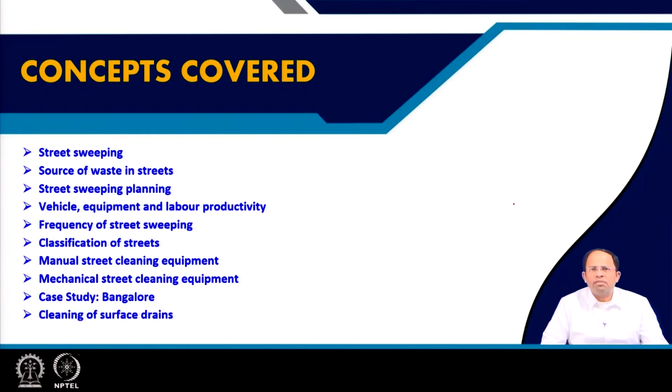Street sweeping is essential for all urban areas, particularly in the Indian context, because in many places in India we don't have a very efficient waste management or collection system, and a lot of people throw garbage on the streets, which requires cleaning. Cleaning of streets ensures a clean and hygienic urban environment, and it's a very basic service provided in most ULBs.

We can go for both manual and mechanical sweeping, but in most parts of India we have very narrow and congested roads, so the only option is manual sweeping. Because of this, the entire planning has to be done so that a group of individuals, whether informal waste workers, workers under a contractor, or workers who have formed a self-help group, come together to provide this kind of service.

Sometimes this staff also belongs to the municipality, since municipalities have a lot of cleaning staff, and many of them have shown interest that they don't want to clean or collect garbage from houses or residences; instead they prefer the street cleaning part. So street cleaning is provided by both municipalities or ULBs using their own staff and contract employees, as well as via self-help groups using informal workers.

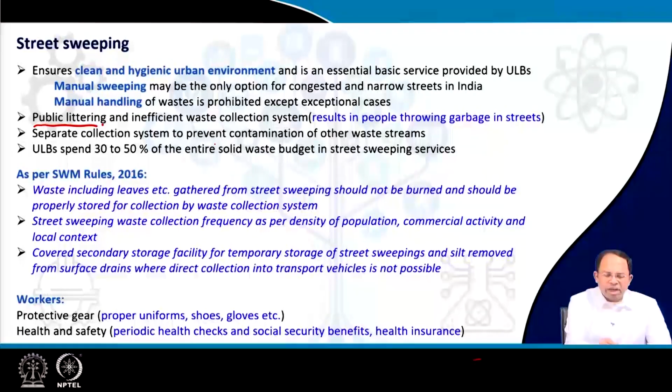Now, this waste stream must not mix with other waste streams, because street sweeping waste usually contains a lot of contaminants, including heavy metals, and if it gets mixed with other waste, it will contaminate those as well.

Sometimes street sweeping is not done alone. Surface drains are also cleaned along with street sweeping, so the silt, sewage, or sludge from the drains may get mixed with the waste, which may contain pathogens. So it's better to keep this waste stream totally separate from other municipal waste streams.

Now, coming to the cost of this kind of service: it's an essential service and has to be provided, otherwise our streets will be filled with garbage. But at the same time, because it's a manual operation done for every street almost every day, ULBs spend around 30 to 50% of the entire solid waste budget on street sweeping services.

As per Solid Waste Management Rules 2016, waste including leaves gathered from street sweeping should not be burned and should be properly stored for collection by the waste collection system.

The leaves and such waste are gathered in the streets from the surrounding vegetation or trees planted along the streets. These should be collected, and we can actually utilize this kind of waste for composting.

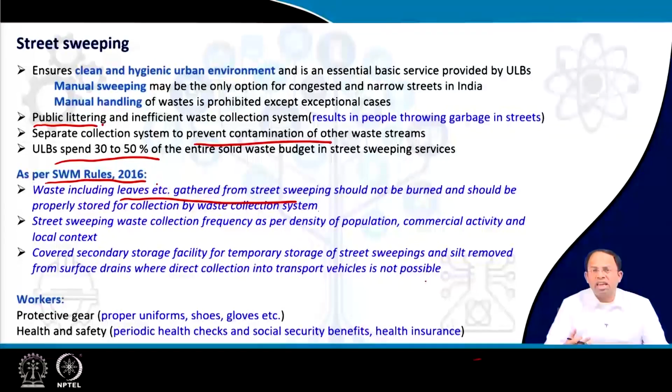A manual waste worker can sweep the streets and store the waste directly into a vehicle, which is then taken for further transport. But if this is inefficient—because after walking maybe 50 meters the vehicle gets filled, requiring a trip to the transfer station and back—that approach may not work well.

Instead, the worker can continue walking and use a storage container along the way—storing waste there as the vehicle fills up, and continuing to store waste in containers. Later, a vehicle comes at a certain time, picks up waste from all these containers, and takes it for disposal or treatment. Both models are fine; depending on the context, the kind of street, and the amount of waste, we must design whichever system works better for that particular area.

All workers should be given protective gear, that means proper uniform, shoes, gloves and all, so that they are protected because they are handling waste. Health and safety is a primary concern.

There has to be periodic checks, and not only physical health but also financial health as well. We have to make sure they are well protected with health insurance and other social security benefits, because there is a chance they are dealing with the waste of society and may fall sick, and society has to take care of them.

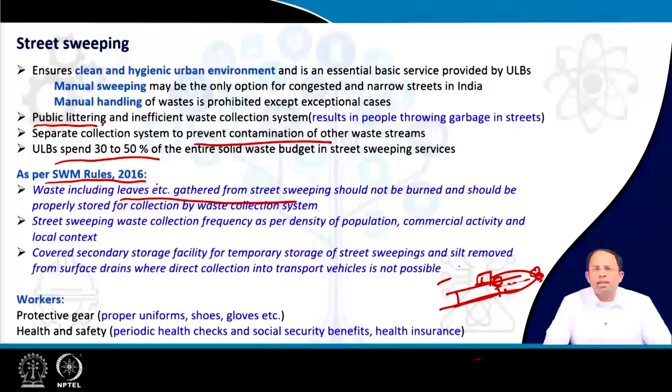Now where does the waste coming into streets come from? One part is natural waste, which is dust from unpaved areas. But even though some Indian cities are very well paved, we still find a lot of dust. The reason is the wind pattern, the surrounding land use, and the nature of soil or how arid it is.

The dust that we find in a particular area is both from local as well as distant origin. That means it may have originated far away, but because of wind it is blown into the city. So that's the first source of natural waste.

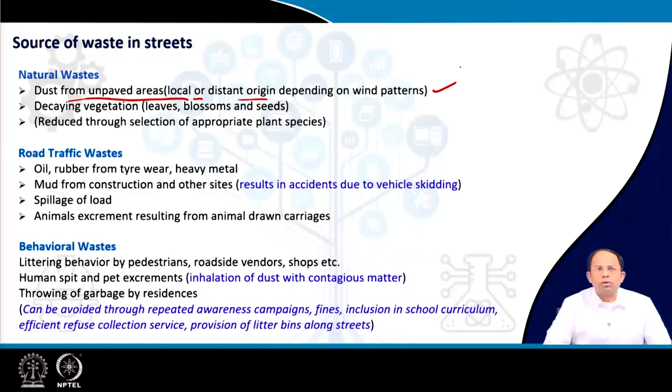Then decaying vegetation - leaves, blossoms and seeds from plants planted along the streets - they fall on the ground, and that is what needs to be collected.

But this part could be reduced because we can select appropriate plant species which don't shed their leaves often - perennial trees instead of deciduous ones which shed their leaves during winter or other seasons. So accordingly, we can choose vegetation which is long lasting and will not shed leaves so much.

The second source of waste is artificial - road traffic waste, oil from cars, rubber from tire wear, heavy metals from fuel, unburned fuel and rubber. All this falls on the street and remains there.

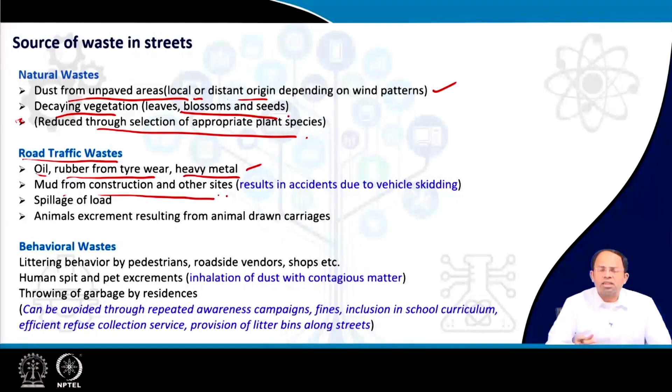Then mud from construction and other sites - a vehicle may move into a construction site and come out with mud, spreading it into the entire street. This results in a lot of skidding for other vehicles, because if there is mud in the street, two-wheelers and others can skid, causing accidents.

Then vehicles can spill their loads. Sometimes vehicles which are not covered properly will spill, including many municipal waste management vehicles - they have a cover, but still from the gaps you will see waste spilling out from those vehicles.

Finally, animal excrement resulting from animal drawn carriages. In some cities we are still using animal drawn carriages, or sometimes animals that are not supposed to roam inside our cities still do, and from their excrement the roads get contaminated. All this garbage originates this way.

The final thing is behavioral waste. This part of the waste we can actually solve through proper awareness campaigns and proper teaching of the people. This is all based on human behavior.

Littering behavior by pedestrians, roadside vendors, and shops. Even though sometimes a garbage bin is provided, roadside vendors and shops will not throw there, but somewhere else. Or people using those roadside vendors will throw somewhere else. Littering behavior of pedestrians also plays a role.

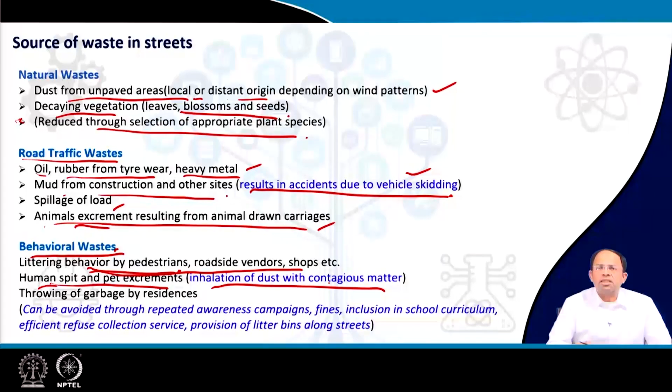And the problem is dust and all - there is a lot of dust in Indian roads. It gets mixed with this contagious matter, then we breathe that, and that leads to other kinds of diseases.

Then there's throwing of garbage by residents. This is more of a reason because other options may not be present or may not be affordable, so people just throw garbage in the street. This kind of behavior can actually be prevented.

This can be avoided using repeated awareness campaigns in a city, fines, and by taking positive measures we can prevent that. We have to incorporate fines, then inclusion in the school curriculum so kids are taught about all this, an efficient refuse collection service, and provision of litter bins along streets.

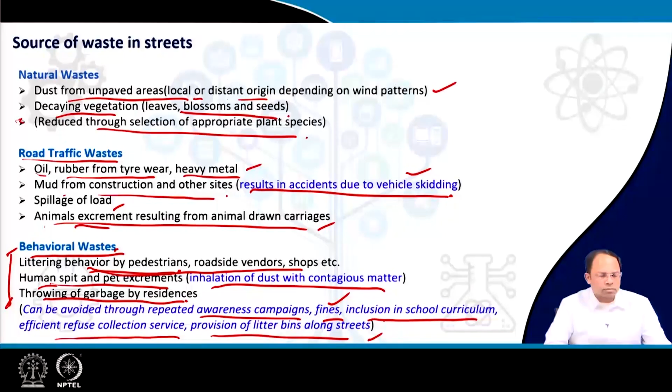So we have discussed this earlier as well. So then, how do I plan for street sweeping?

As we have learnt earlier, the cost of street sweeping and collection is very high, higher than collection from storage containers. That means if a person throws garbage in a storage container, it's easy to collect instead of first cleaning the streets, gathering the garbage and then putting it in the container or directly into the vehicle. So it's always better to put an adequate number of litter bins along the street so people throw their garbage inside those bins, because it will reduce my cleaning time and require fewer people to clean those streets. We can provide both domestic and street litter containers for this purpose.

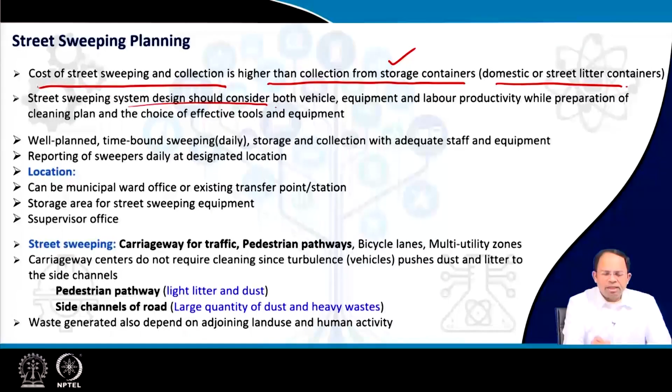Street sweeping system design should consider vehicle, equipment and labor productivity while preparing the cleaning plan and choosing effective tools and equipment. It incorporates human beings, because in most cases we use manual cleaning, but sometimes it may involve larger vehicles or equipment for mechanical cleaning. Lots of tools and equipment are also required to support these activities. But we have to understand which mix of all this, or which models, result in the most efficiency, or rather the most productivity.

Sometimes we find that if an area is very dense, we've discussed labor and vehicle productivity earlier for solid waste collection - the same concept applies here. When we have a road stretch that's very dense, with a lot of waste being generated in the streets, my wheelbarrow will get filled very fast, and whenever it gets filled, I have to take it to the point of disposal.

So an alternate way could be to use a street cleaning vehicle or mechanical vehicle that can cover a larger section of the street at the same time, taking care of the work many workers would otherwise do. Because it has a larger container, it would be efficient to run this operation, both in terms of cost and otherwise. So it depends on which model will work. But maybe in the same city, the road is not designed in a way where a mechanical vehicle could be deployed. All this leads to the selection of an appropriate mechanism - that is what we have to actually find out.

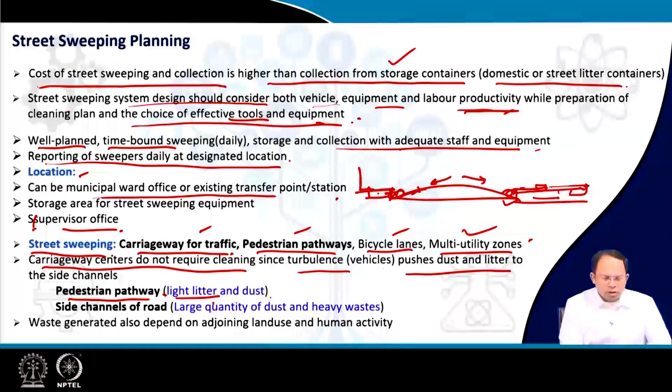People while walking may throw some plastic packet or something, so that is the pedestrian pathway. Whereas at the side channel of roads, at these particular corners, we generate a large quantity of dust and heavy waste. So all this waste comes to the side and gathers at these particular corners.

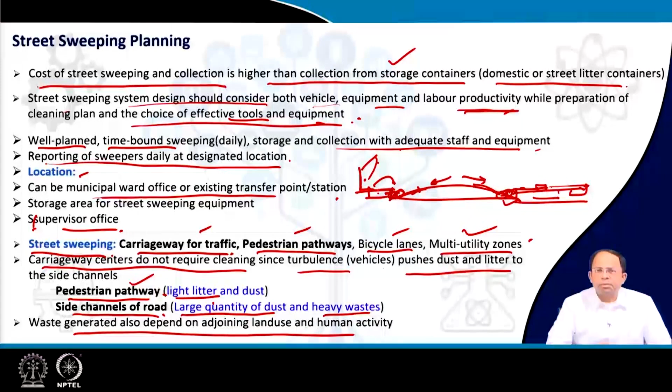So, the waste generated also depends on adjoining land use and human activity. Obviously, if along a particular area you have a continuous stretch of eateries, the waste generated would be as per whatever shops are there along that street.

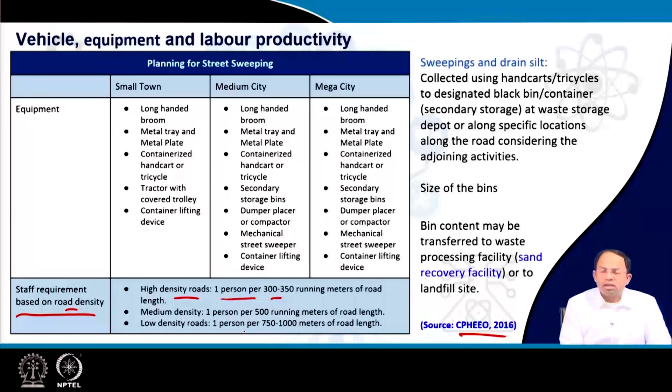Now, these are suggestions for preparation or procurement of equipment, and how many staff you require for different kinds of cities. So you can see over here, staff requirement based on road density. This is given by the CPHEEO manual. It says that for high density roads, we require around 1 person per 300 to 350 running meters of road length. For cleaning around 350 meters of road, you require 1 person per day.

For medium density roads, a person can cover around 500 running meters. And for low density roads, around 1 kilometer of road could be covered by 1 person.

Similarly, what kind of equipment is required depends on which kind of city you are in. Now, the primary difference is the basic cleaning equipment is the same. You require a long-handled broom, or any kind of broom, a metal tray and a metal plate. Why? Because these are used to scoop up the waste which is stuck, like mud and all. You need to press with the metal plate, and once it gets loosened up, you can put it in the tray.

Then there is a need for a containerized handcart or tricycle, as you can see in all the cities, because that is where you put your waste first initially. In some cases, you can have secondary storage bins - since the vehicle gets filled very fast, it's better to keep it stored and keep using the vehicle, otherwise I'd have to take it back to the disposal point each time. So a secondary storage bin is required, placed at certain distances so that I can quickly come back with the vehicle after putting the waste there.

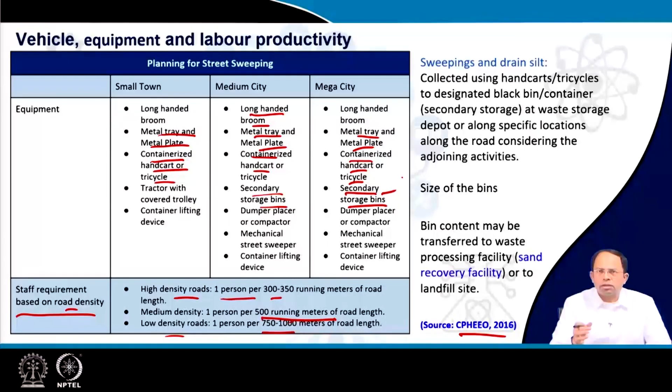Then a tractor with a covered trolley can directly take the contents of the handcart and take it to the landfill site.

It could be a container lifting device as well. Any one kind of vehicle could be there. In case of a medium sized city, we can have similar kinds of vehicles for carrying these larger bins to the final processing site, either the compost plant or the landfill site, or for any other kind of treatment site.

We can also have mechanical street sweepers in both medium or mega cities, and the rest are more or less the same. That means mechanical sweeping is only possible in larger cities where we have wide roads and proper, planned ROWs, whereas in small cities we don't usually have footpaths or properly planned ROWs, and the roads are too thin. So it's better not to go for mechanical sweeping there.

Drain silt, as we said, is also collected along with road sweeping. So we can collect both road sweepings and drain silt using handcarts and tricycles, and they could be taken to designated bins or containers, which are secondary storage at a waste storage depot or other specific locations along the road, considering the adjoining activities.

Maybe it's not possible to have that secondary storage at every 50-meter or every 100-meter stretch of road. So we have to do that amount of movement to a point where we are able to store it, where there is adequate space in the road to set up this kind of secondary storage containers or bins.

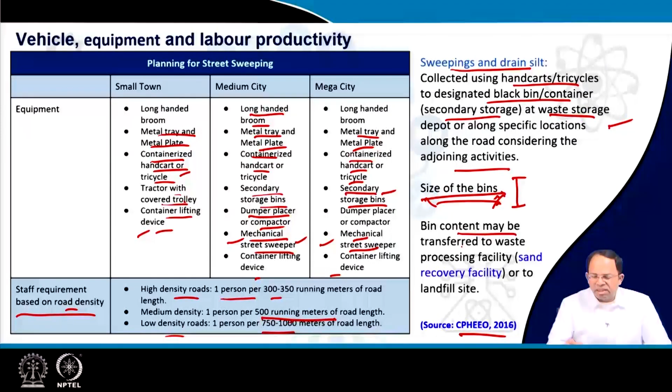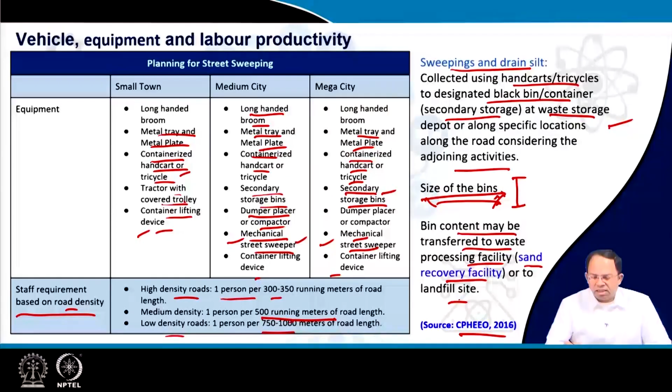Bin content may be transferred to a waste processing facility where we can recover sand, or to a landfill site. In case of organic compostable waste, we can take it to a compost plant, whereas for inert waste or other kinds of road dust, we can take it to a waste processing facility where we can recover sand, and everything else can be taken to the landfill site.

Frequencies of sweeping could be several times a day or even once or twice a week. Now, the time for street cleaning should be such that it doesn't hamper other activities. For example, we can start in the morning, give a break during peak hours, and then in the non-peak hours complete the cleaning process.

Also the shifts require planning, because we cannot make people work more than 8-9 hours, so we have to plan our shifts accordingly. This operation goes on for the entire week, in most cases every day. So the same person cannot keep working 7 days a week continuously, so he has to be given breaks.

That's why the total number of staff required is more than what we would estimate based on the distance versus the number of people required to cover a certain amount of distance per day. We have to keep some more staff in reserve so that people can take holidays on a rotational basis.

The time of street cleaning is again dependent on the city itself, which time it is, whether we are having peak hours, based on what activity is going on along that particular street. All this plays a role. So it is based on considering conflict with traffic during peak hours, parked vehicles, and pedestrians, which helps determine what kind of time would be suitable for street cleaning services.

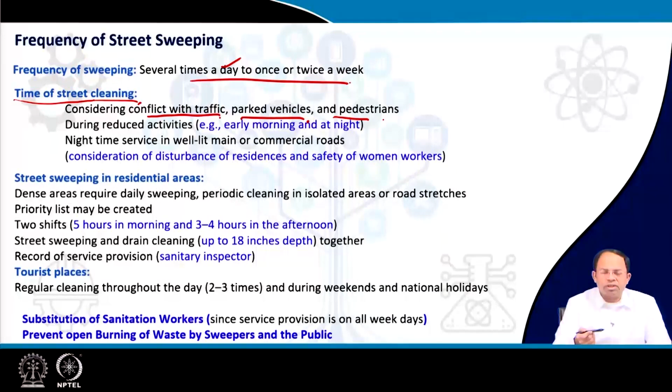Usually it is early morning or at night when there is less activity. Nighttime service could be done, but it should be in well-lit areas, particularly on commercial roads where it is fine. But we have to be careful about disturbing residences and also the safety of women workers. So nighttime street cleaning is done in many streets, particularly mechanical cleaning, which is done at night time when the roads are absolutely empty.

Street sweeping in residential areas and dense areas requires daily sweeping, while periodic cleaning is sufficient in isolated areas or road stretches. The denser the area or more activity it has, the more waste it generates, so it has to be cleaned more frequently compared to isolated or less dense areas.

We can create a priority list for each city indicating which roads need to be cleaned and what priority of cleaning should apply to each street. There could be two shifts for cleaning: five hours in the morning and another three to four hours in the afternoon, with a break in between for workers. Street sweeping and drain cleaning can be done together, with drains up to 18 inches deep handled by the street cleaning team.

Record of service provision covers all these activities: reporting of the street sweepers, what area stretch is covered in a day, how much waste is generated, and which vehicle was used to transfer it to the final destination or processing site. These records are maintained so that in future we can predict how much staff and cost is required for cleaning services, or make street cleaning more efficient.

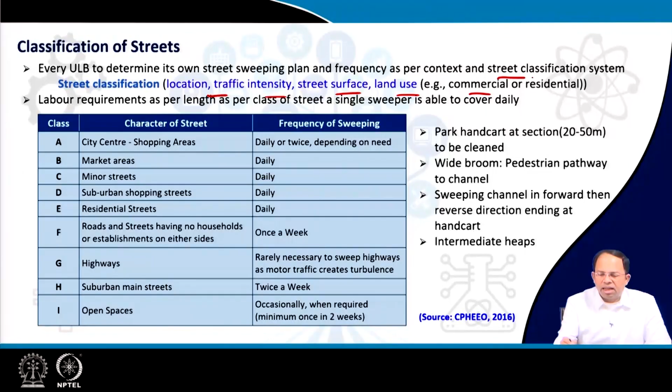These are some classifications of streets based on location, traffic intensity, street surface, and surrounding land use. Based on this street classification system, every ULB determines its own street sweeping plan and frequency as per local context. This means depending on how much waste and what kind of activities occur on a particular street, we determine how often to clean it, where, and at what time of day.

Labor requirement is given as per length and class of the street. It depends on the length of the street and how much can be swept, and also on the class of street, because for higher classes the roads are wider and the amount of dust is also more. All these factors determine what length a person can cover for different classes of streets.

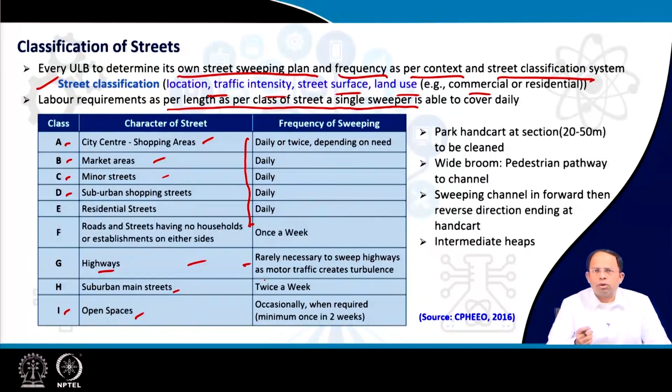These are the suggested cleaning frequencies for each street class. Highways require rare cleaning because turbulence takes the waste away, and people don't keep their windows open on highways, so they don't throw garbage out, unlike on other streets. Highways also don't have too many pedestrians. For areas without many people around, with no households on either side of the street, cleaning once a week is adequate. This is how we decide on cleaning frequency based on different types of urban streets.

Usually the way the streets are cleaned is you park your handcart at a particular area, and then for the next 20 to 50 meters section, that part is cleaned. Usually the pedestrian pathway is cleaned first, and whatever dust and litter is gathered is first put into the channel space of that particular carriageway. Then the channel is swept forward till the end point is reached, and then you can come back from the other side of the road and reach the same point, then load the garbage into the vehicle and move the vehicle to the next point. That is how it keeps on happening.

In between, if you feel that your wheelbarrow is getting filled, you can create intermediate heaps at that point, and then a person with a wheelbarrow can come and pick up the garbage. So either I push the wheelbarrow along, or we keep making heaps at intermediate points, and then I can pick up the garbage by taking the wheelbarrow there.

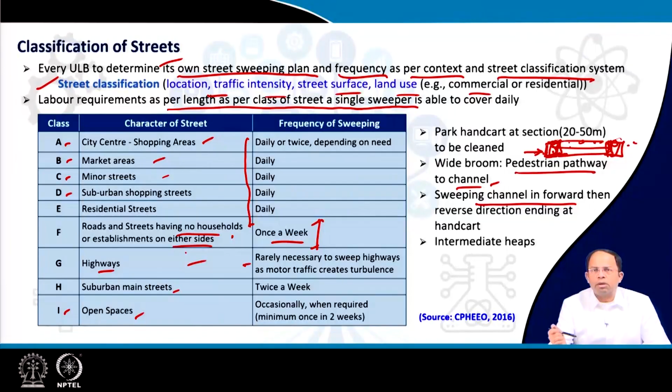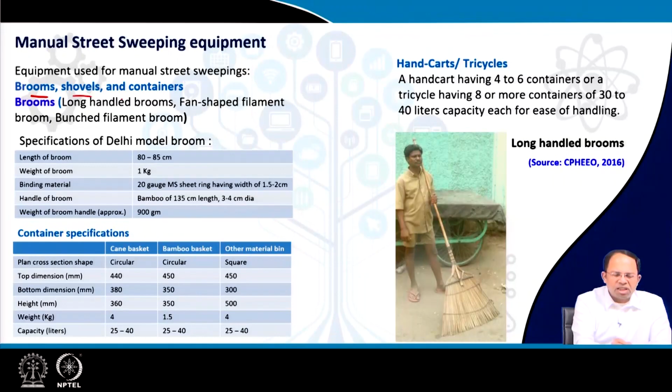So these are some of the equipment you can see in this picture. For street sweeping we require brooms, shovels and containers. These are obvious - you can see this is the long-handled broom.

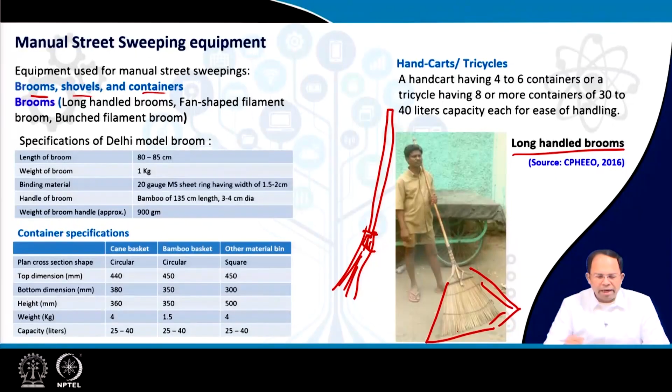This is the typical design, whereas a Delhi broom looks like this, with a bamboo pole fitted at the top. This one is more spread out. There are different specifications: long handle brooms, fan shaped filament brooms, bunched filament brooms. This is a bunched filament broom kind of thing, called a Delhi model broom, and you can see it weighs around 900 grams. The handle is around 900 grams, the broom is around 1 kilogram, and that is how this thing looks.

The containers could be of different sizes so they could be easily handled. You can see containers of 4 kilograms or 1.5 kilograms, height around 350 to 500 millimeters, capacity around 25 to 40 liters. That is more or less the size a person can handle.

Similarly, a tricycle can have multiple containers fitted inside it - all these containers can go inside the tricycle, with 6 to 8 or even more containers. Usually the containers are of 30 to 40 liters capacity each, because that is what a person can lift. Beyond that it would be too heavy. So this kind of design, both for the vehicle and for containers, is adopted for street cleaning.

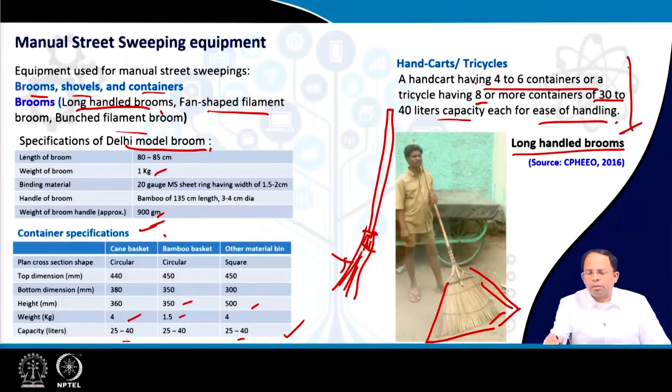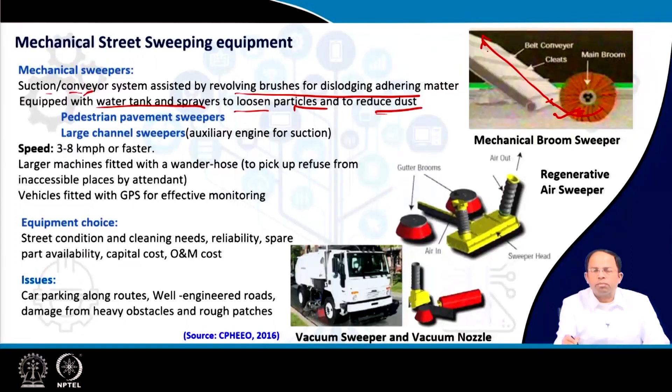Over here you can see the same broom working, and this is a conveyor system. The broom pushes the garbage onto this, and the conveyor takes the garbage up to the vehicle, to the loading arm. The loading part of the vehicle is here, and the garbage is put inside the vehicle.

The other option is the suction part, where there could be different kinds of suction mechanisms: a regenerative air sweeper or a vacuum sweeper. The vacuum sweeper is pretty straightforward - the broom system dislodges and pushes the waste towards the vacuum nozzle, and the waste is sucked in. In the regenerative air sweeper, air itself is used to loosen up the dirt, and then the same nozzle has the vacuum system as well.

The loosened dirt is sucked up by this particular system. The speed of these vehicles is around 3 to 8 kilometers per hour. Based on that you have to determine how many vehicles are required to clean the segments of road that you are planning to clean using a mechanical system.

Usually arterial roads and wider roads are cleaned by these vehicles, whereas smaller roads are cleaned manually. Larger vehicles are also fitted with a wander hose, a separate hose which a person carries to pick up refuse from areas inaccessible by the mechanical broom. There are many parts of the street this will not reach, so like a normal vacuum cleaner, you take this pipe and use suction to pick up the waste.

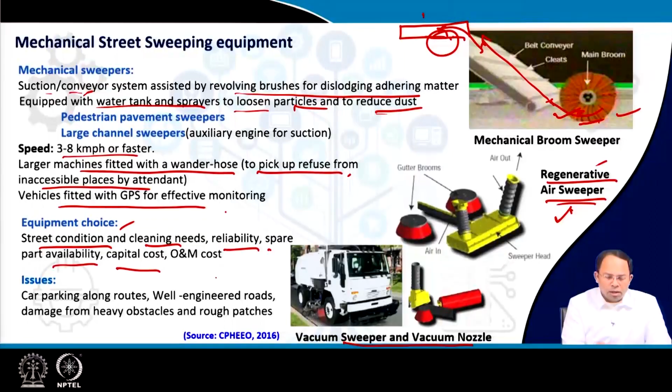Vehicles are also fitted with GPS for effective monitoring of operations and movement. Now, which kind of vehicle is suitable, what scale of vehicle is usable? There are different scales - small size vehicles, large size vehicles, and so on - depending on capacity, speed and efficiency of that particular vehicle. Street condition and cleaning needs, reliability of the vehicle, spare parts availability, capital cost, and operation and maintenance cost all play a role in determining what sort of vehicle would be suitable for my urban area.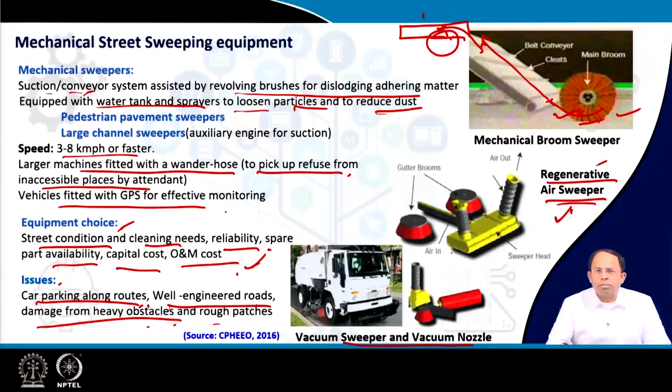Some issues with mechanical cleaning: car parking along the routes. If people park their cars at night along particular road stretches, you cannot clean those because the silt and dust gather at the side channels, so you cannot access those side channels. Also, well-engineered roads may not be there - this requires properly laid out roads with smoother surfaces, but sometimes that's not the case. Sometimes, because of heavy obstacles or rough patches, the system gets damaged and we have to repair it, and sometimes spare parts are also not available.

So we will do a quick case study of Bangalore. Here both manual and mechanical sweepers are employed. Special areas are also covered, like commercial areas, markets, slums and high profile areas, for street sweeping services in addition to the streets.

Manual workers are known as Pourakarmikas in Bangalore, and they are allotted to major, intermediate and minor roads. Usually they report around 6 to 6:15 in the morning, gather, and at 6:45 are transported to different areas from where they will start collecting and begin their street sweeping process.

From 10:45 to 11:15 is the peak hour - they take a food break and are sometimes redeployed to other areas. From 11:15 to 2, there is another phase of collection, transportation and street sweeping after they are taken to their location. Finally, from 2 to 2:30 they return, clean up, and the day's work ends. This is the basic schedule of street sweeping in Bangalore.

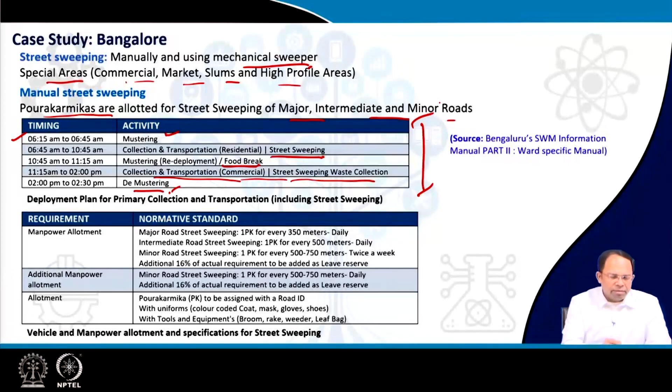The manpower allotment is one Pourakarmika for every 350 meters for major roads, 500 meters for intermediate roads, and 500 to 750 meters for minor roads, and around 16% of actual requirement is added as leave reserve for people taking leaves.

Pourakarmikas are assigned road IDs, uniforms, color-coded coats, masks, gloves, shoes, and tools and equipment like broom, rake, weeder, and leaf bags. The leaf bag is for storing leaves, and other bags are for storing inert waste, which may be stored directly into the vehicle. Weeders are for cleaning weeds, brooms are for lifting, and rakes are for scraping - all these tools are given to the workers.

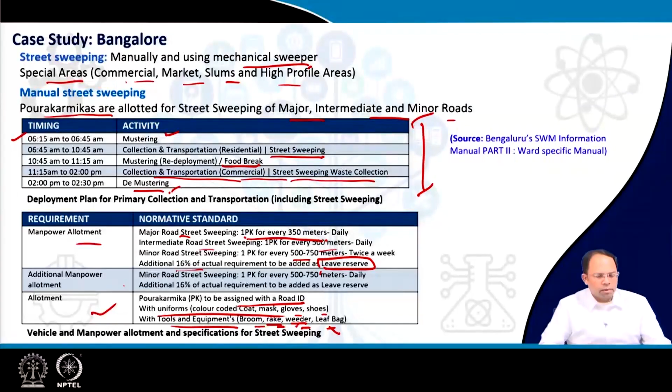For different kinds of roads - major, intermediate, minor - there are different times of operation. Approximately 0.5 kilometers is covered in a 4 hour period, and for the remaining 2 hours the PKs are redeployed for gang work, intensive cleaning, and cleaning of burial grounds, vacant sites and open ground. So primary street cleaning happens for 4 hours, with another 2 hours for cleaning other kinds of public areas.

So more or less it's the same for all the streets, only the number of workers deployed on different sides of streets is different.

Over here you can see the same thing. An auto tipper with 500 kg capacity is waiting, that is the vehicle these cleaners come with. They have bags with them, and for every 50 meters they travel, this is the end point of the collection cycle. From here they transfer the garbage back to a vehicle like this, which will either take it to a compost plant for leaf waste, or to a bigger vehicle to transport it to the landfill site. So this is how the plan works, and this is how vehicles and manual laborers are deployed for collecting garbage.

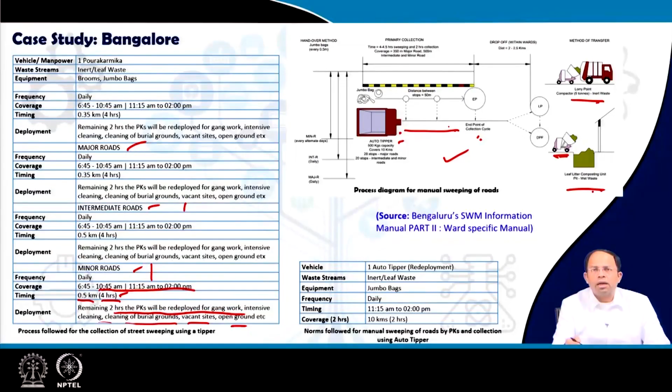Similarly, for mechanical sweeping, the rate is around 12.5 kilometers for roads with medians, that means divided roads, because you have to clean from both sides, so your work doubles almost, and 25 kilometers without median. So one vehicle can cover around 25 kilometers if there is no median. In addition, there is one Pourakarmika for every 1 kilometer, and major and intermediate road sweeping is done daily. An additional 16% of people is required as backup for leave reserves and so on. So this is how it more or less works.

You can see the vehicle being deployed. It reaches the end point of sweeping, then transfers the load to a lorry, and may travel another 2.5 kilometers to do this kind of transfer. Overall it works for 4 to 6 hours, and the distance covered is around 15 kilometers for a 4-lane road.

So this is a case study for street sweeping services in an ULB.

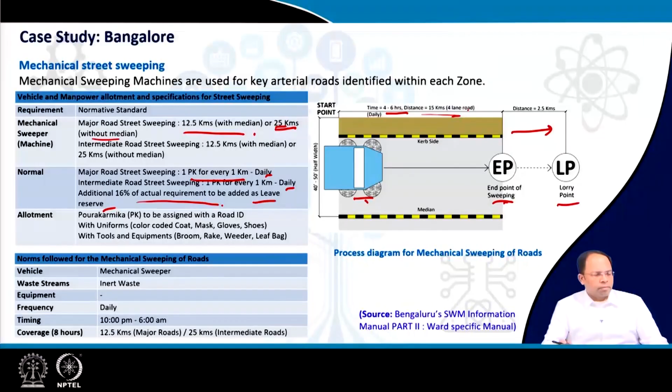Now coming to cleaning of surface drains, of course surface drains in urban areas should be covered, and there should be a sewerage network, but in many cases surface drains in our country are not covered, or people deposit silt, or normal deposition occurs. Even though surface drains should be designed with adequate self-cleansing velocity so they stay clean, still siltation happens and they need to be cleaned at certain intervals.

Drains up to a depth of 45 to 50 centimeters are cleaned by the road sweeping staff themselves, or we can have another group of staff in the same team, like drain cleaners, who take care of this. Staff requirement is similar, almost 500 meters per day per person, so based on the kilometers of road you can determine the staff needed for cleaning of drains, in addition to cleaning of streets.

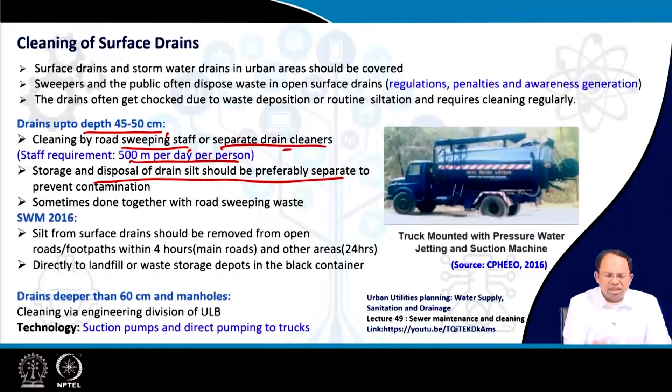Storage and disposal of drain waste should preferably be separate to prevent contamination. Sometimes it is taken together with road sweeping waste, but if possible we have to segregate between road sweeping waste and waste coming from drains. The silt from surface drains should be removed from open roads and footpaths within 4 hours for main roads, while other areas should be cleared within 24 hours. This waste is taken directly using black containers to the waste storage depot or to the landfill sites directly.

Drains deeper than 60 centimeters, and even manholes, cannot be cleaned by road sweepers. There we have to deploy mechanical equipment, and it has to be done by the engineering division of the ULB. It's a planned service where we use suction pumps and pump directly to trucks such as this, cleaning the drains using various mechanical means.

Now for cleaning of underground sewers and such, if you are interested you can look at this particular lecture available on YouTube, Lecture 49, Sewer Maintenance and Cleaning, from the NPTEL course Urban Utilities Planning: Water Supply, Sanitation and Drainage.

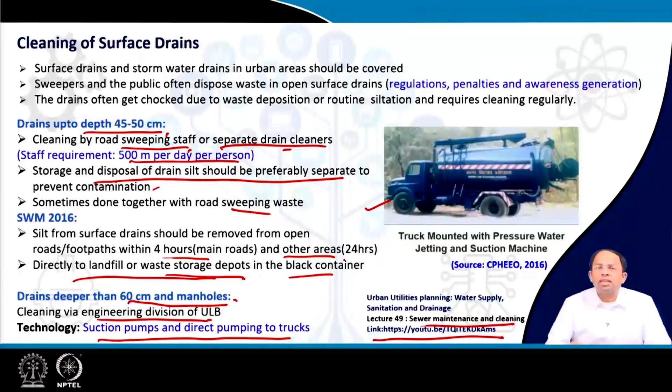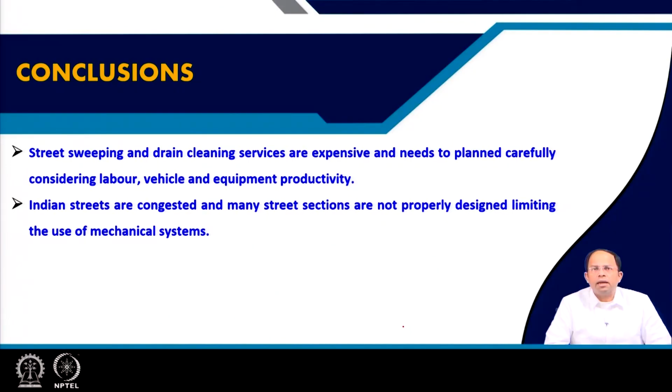To conclude, street sweeping and drain cleaning services are expensive and need to be planned carefully, considering labor, vehicle, and equipment productivity. Indian streets are congested and many street sections are not properly designed, limiting the use of mechanical systems. So in many cases we have to plan for manual operations entirely, but in some cases we can also use mechanical operations. Thank you.